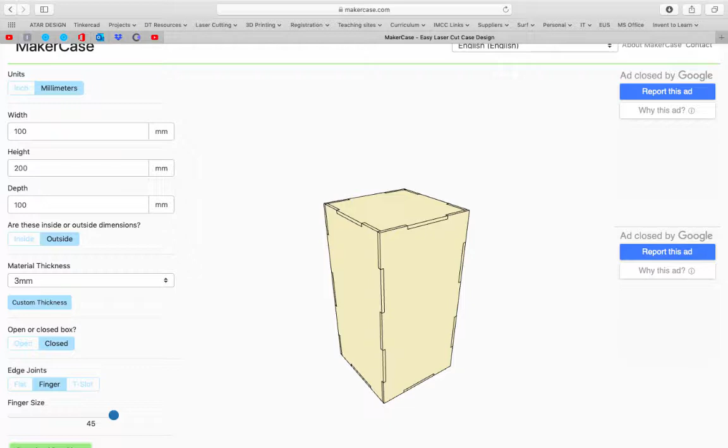Now obviously all of these dimensions can be changed around to suit your design. The material thickness is 3 millimeters, that's perfect. And the finger joints are set to 45, or 48, basically the maximum thickness. It just makes the maximum size of finger joints, which makes joining everything together as simple as possible.

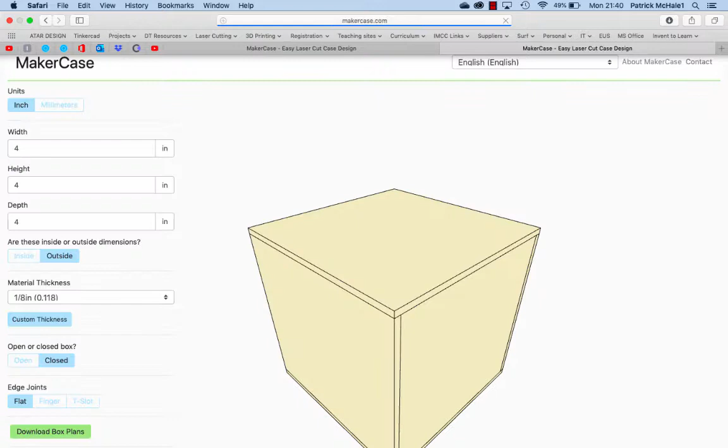So if I go on to Google here, I will type MakerCase. It sounds just like our Makerspace. Monday afternoon, 3:15 to 4:30 at the college. Makerspace.com, MakerCase. Wow, how many times can I say that wrong? And millimeters, there we go.

Put in the measurements you can see on the page over here. Once you have everything input, just like what we have here, make sure you check your finger size so it looks like this. You can download box plans. Now, this is what the program or website is going to spit out, which is perfect.

We want to download SVG. That's something we can pull into Adobe Illustrator. So we click download SVG.

So if I go File, New, custom size is ideal if you have something similar. A3 is probably the biggest size you can get there, but you can go into custom, if you have the same setup in your version of Illustrator, click on custom.

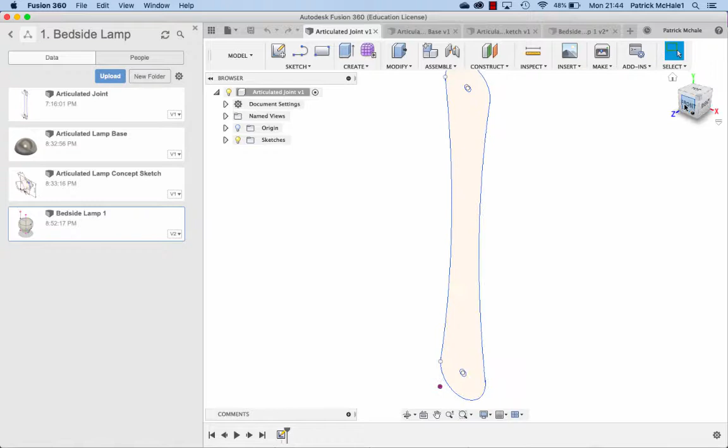Now there are three components to this. There is the articulated joint, which I've drawn here. That's just a sketch, and that is a profile we can laser cut.

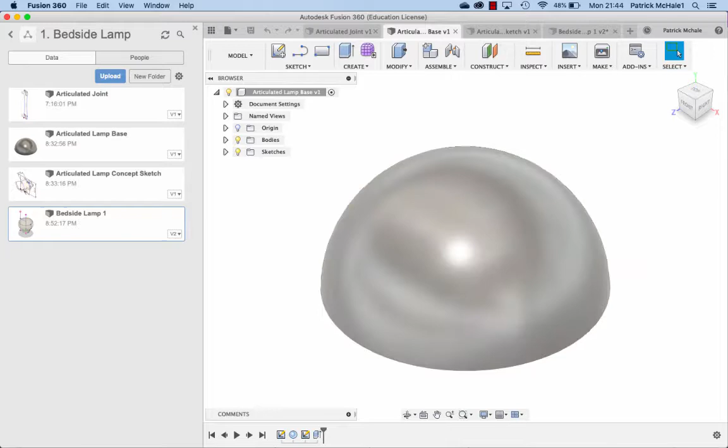Next up, we have the base. This base here is simply creating a sphere, and I cut it in half, as you can see.

And what we're going to do is I brought that into Slicer for Fusion 360. Actually deleted some of these up high because the plan is to join the articulated joint that I just showed you onto this section here when we start prototyping.

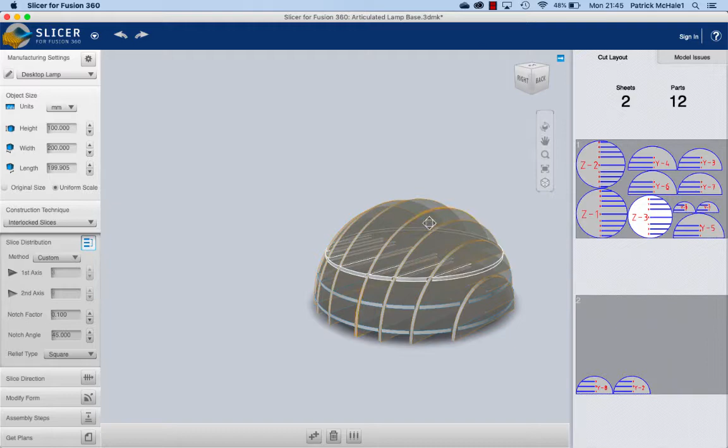That's the joint I was just referring to. So we'll have a bolt going through this hole, and we will have a hole here for that to join into place. Now this articulated joint is going to go here, here, and here, and it's going to eventually join to this little light shade that's on the front.

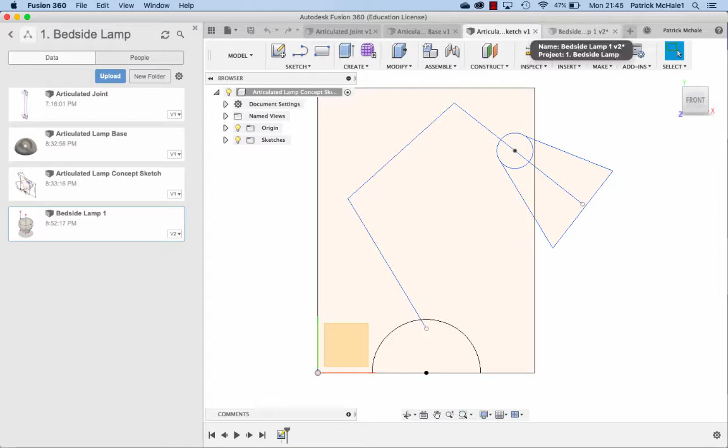Now, in relation to the light shade, this is one I have drawn. I've drawn this around my original light fitting, so if I go in here, you can see that I have loads of different shapes drawn in this particular drawing here.

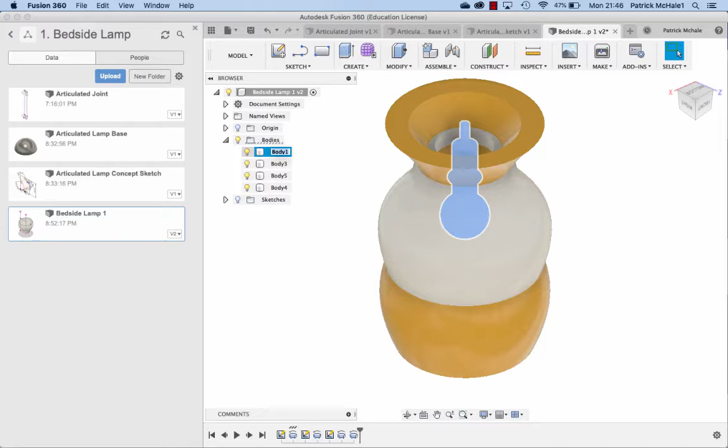The one that I want is just down here. Okay, so that's what I'm working with. The reason I'm showing you this is that you can create loads of different bodies around the initial light fitting that you create, so you can get loads of different prototypes.

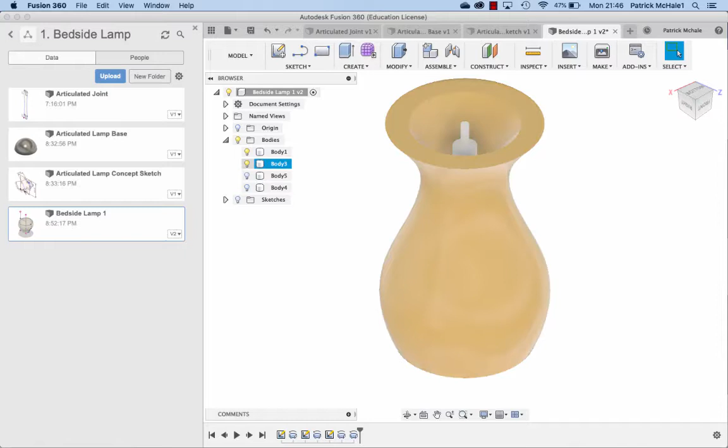For example, this one that I did earlier for the standalone desktop light, if you like. And we have this one here. Let's see, those two are the same. But that is a quick overview of where we are going with the project.

For the 2D sketch and extrude, that's something I will look at in class or at a later date. That is a simple case of, we'll actually try it here, drawing your profile. Let's see, so for example, drawing a 2D profile. I remember someone's got a hand going on. Incredibly bad sketch of a hand here. And drawing that shape in Fusion 360 and extruding it back.

Here we go. Oh, it's not going as bad as I thought. Okay, and turning it into a 3D shape. Okay, that's a bit average. There we go. And the light bulb will be on the inside here.

Be holding the base just here for the light fitting, if that makes sense. But all of that can be created from a 2D profile. Here we go. Beautiful.